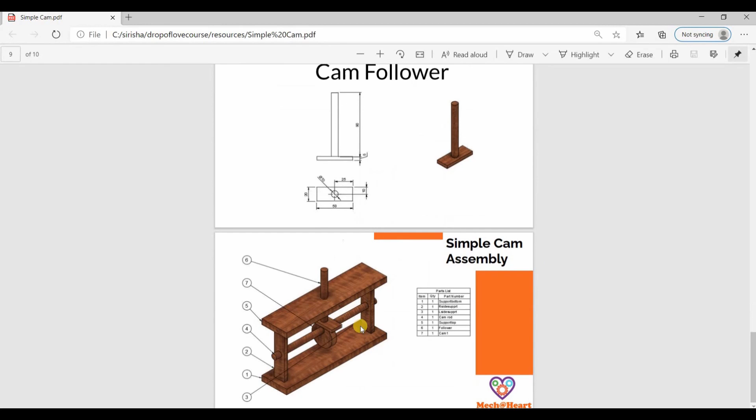From the resources folder given to you, open the SimpleCam PDF. Here you have this PDF which has the drawings for making this assembly of SimpleCam.

This is the bottom-up assembly approach we are going to follow. That is, we are going to create these parts independently and then take a new file and bring all these components together and assemble them. We will be doing them step by step.

In this chapter, we are going to see bottom-up assembly, joints, how to add joint limits, contact sets, and motion study. This is the most important chapter we will see, so please follow each and every step very carefully. The next cams we will do will be based on this simple cam.

Let's keep that PDF open and start designing each part one by one. The first part is the cam. Here we have a circle with diameter 40 mm, and it also has a hole at 10 mm distance from the center with diameter 10 mm, and the thickness of the cam is 10 mm.

Let's open Fusion and go to create sketch. Here let's select the plane, and we can draw the circle which is 40 mm.

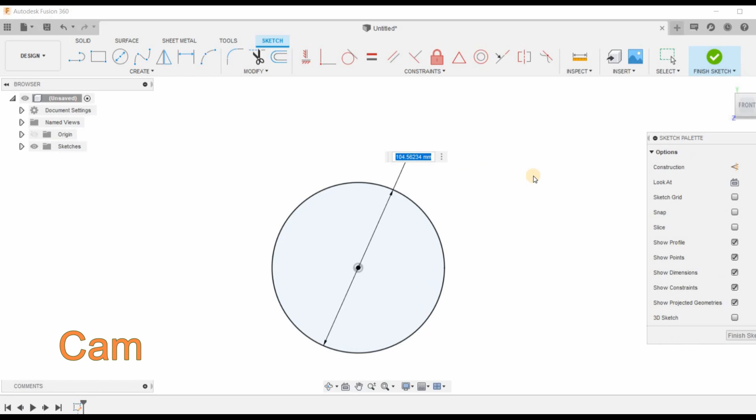Another circle, this is 10 mm. Let's check - yes, it is 10 mm. So here the distance is again 10 mm. I'm taking this vertical constraint because these two centers seem to be vertically aligned. So I'm giving the thickness of 10 mm.

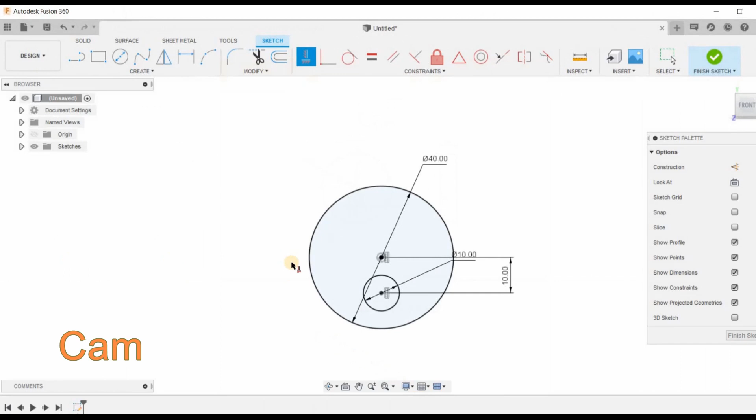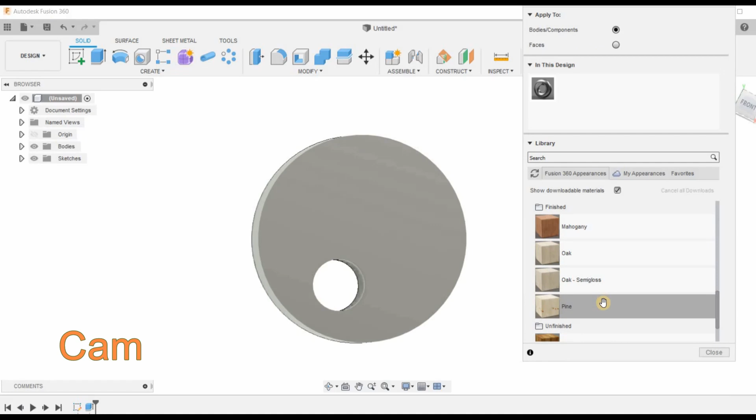Now I have this cam with me. Let's name this inside a folder. First, let me give a color to this - I'm going to go for cherry. If you see, it's looking very blurred, so I'll double click this texture and scale it. Now the grain size seems okay to me.

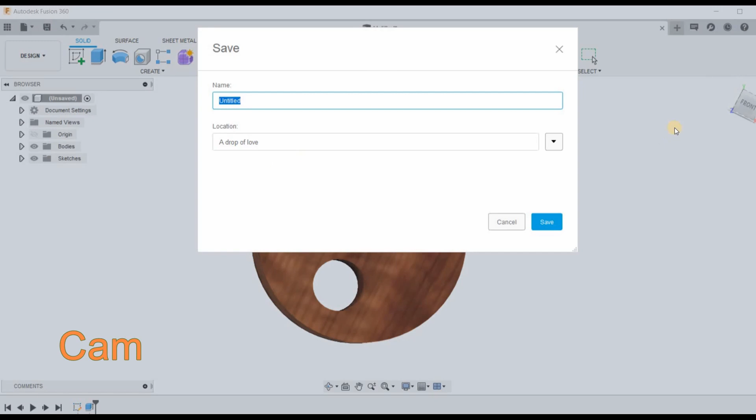Then I'm clicking OK. Before I save, I should have a folder within this project, so I'm going to the data panel. I'll create a new folder with the name SimpleCam, and inside SimpleCam I'll have all its parts. So I'm saving this by the name cam.

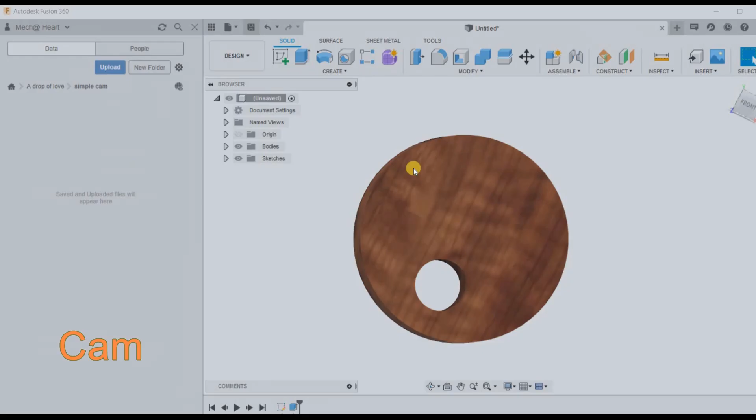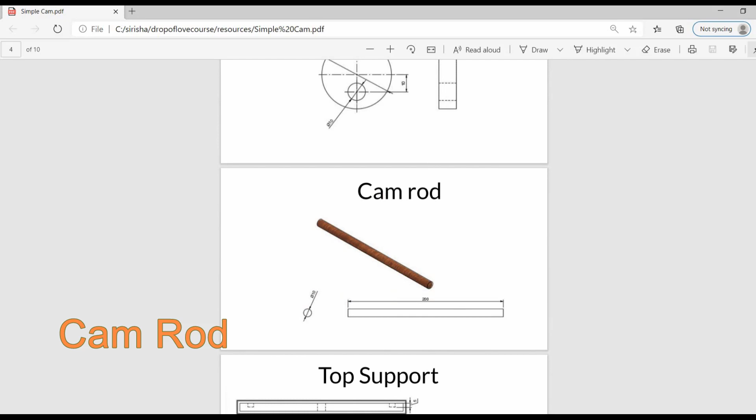Now let us close this. Let's go to the next component, which is the cam rod. It's just a simple cylinder, 10 mm, and I can extrude it to 200 mm.

So here I have selected the sketching plane. This is going to be 10 mm, and the distance is going to be 200.

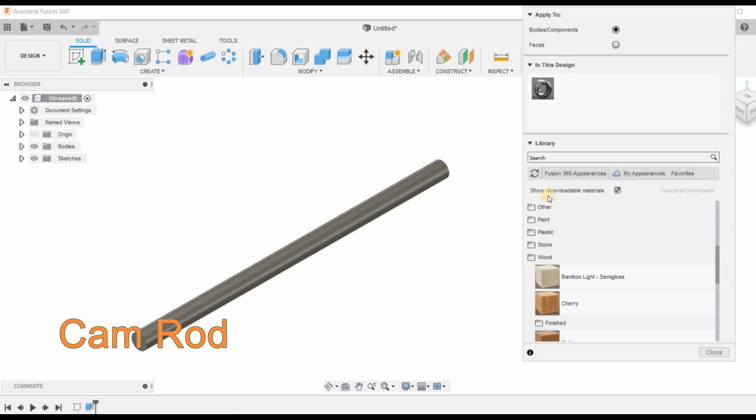Here again, I'm going to give color - selected cherry again and changing its grain size, and now I'm also changing its rotation because it should be longitudinal. Then close this. Let's save this as cam rod.

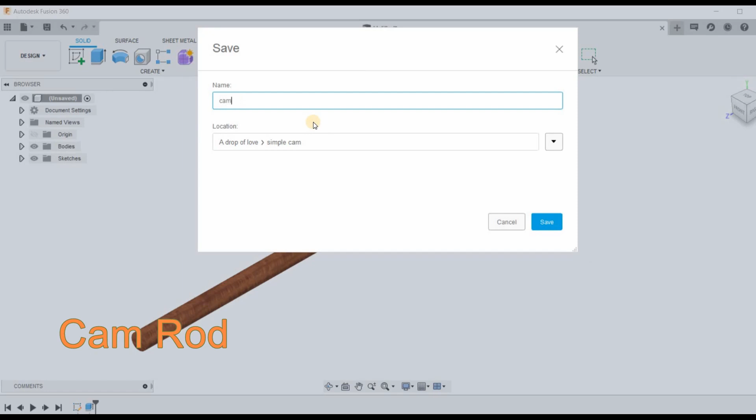If you have done the practice exercises, then all these components are very simple - you can very easily create these parts. Now this is the top support. If you see these pocket holes, these rectangular pockets which are there, they are not through, but the hole is a through hole. So I can create everything in a single sketch, but I'm going to extrude it multiple times.

So let me close this. I'll open a new file. After selecting the sketching plane, I'm going to draw a rectangle, and based on these dimensions, it's a 200 by 50 rectangle with the thickness of 10 mm.

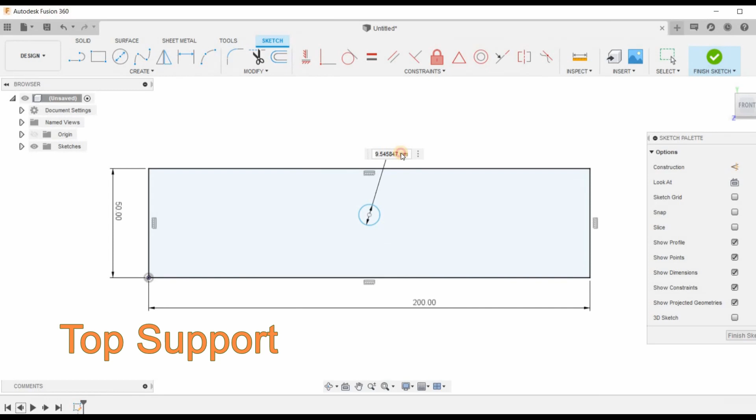And I'm just checking these dimensions also - this is 50. And here I can draw this circle and these pockets, 10 mm, and this is exactly at the center from both sides.

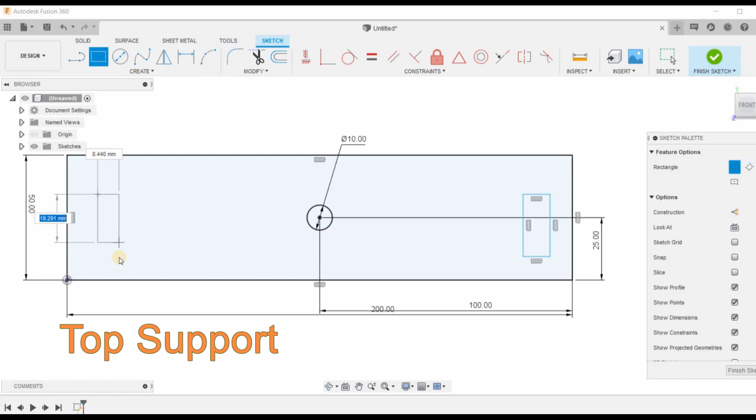Let's create these two rectangles. If I create one, the other can be mirrored because they are both equidistant, if you see. So I'm going to delete one - I'll create a mirror image later. First, let me dimension this.

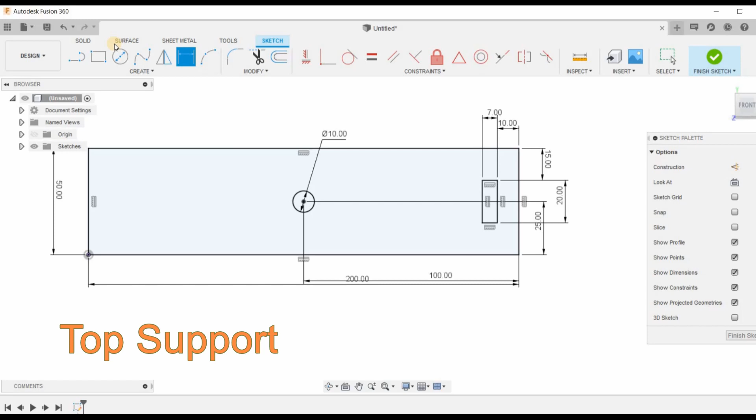This is 7 mm, at a distance of 10 mm from this edge. This is the construction line about which I'm going to mirror this one. So I'm going to create a mirror image over it. I by mistake selected it in the object, so I'm deselecting it. And again, I'm going to select this mirror line, then click OK.

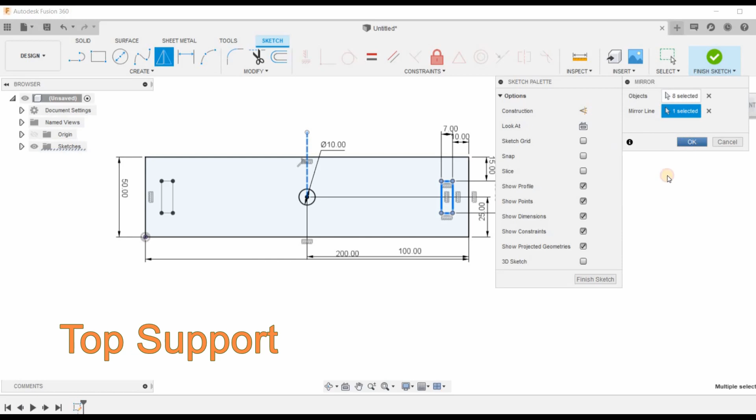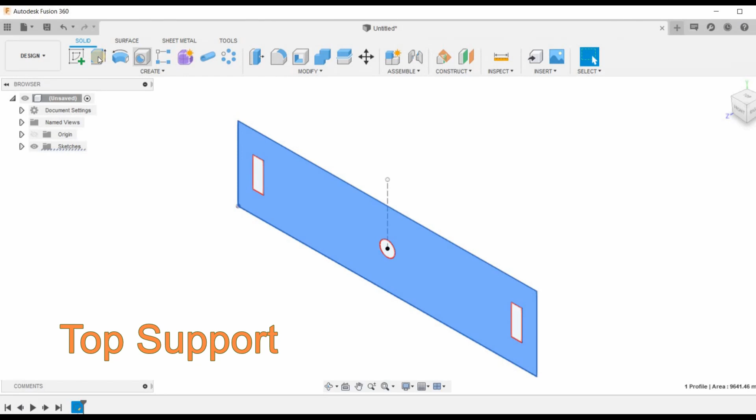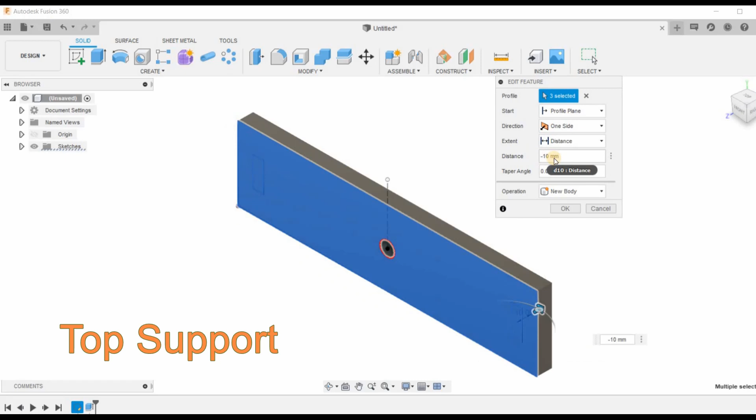So I can give it as 10 mm, but I'll try to give it as minus 10 mm because I'll be able to see the sketch clearly. So here from the sketches, just make the sketch visible and select these two pockets and then go to extrude. Here now I can select cut. I can say that I have to cut it by 5 mm.

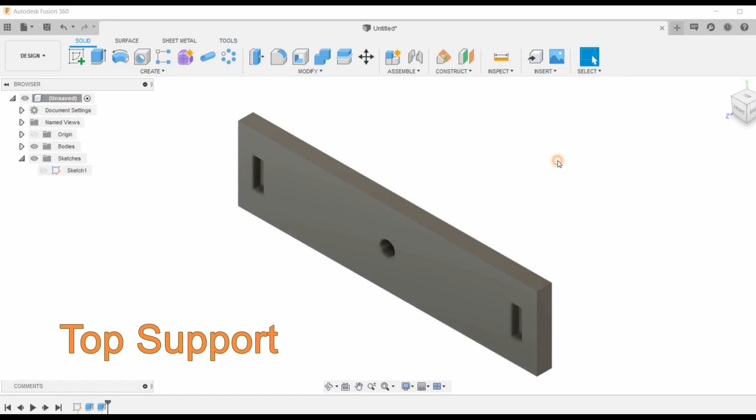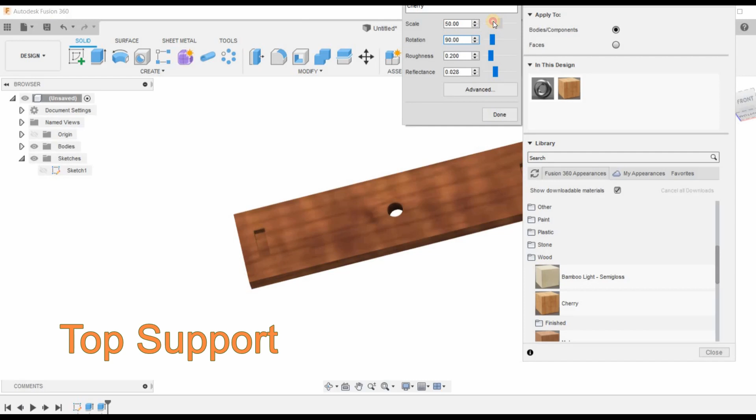Now let's hide the sketch and let's add appearances to it. Let's change the grain direction as well as the scale. Then click done. Let's close this and let's save this. I'm going to save this as top support.

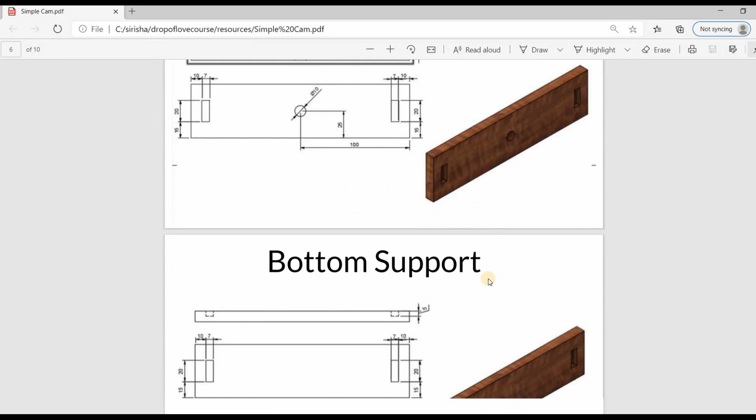Next, if you see, bottom support is exactly the same as the top support. Only thing is this in between hole doesn't exist. So I can save the same file as bottom support in the same folder. And now I'm going to make the changes. So what I'm going to do is I'm going to remove this hole.

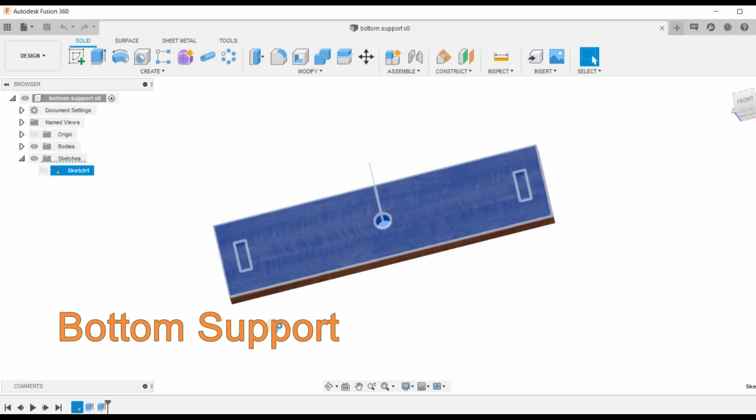So I'll go to the sketch and remove this circle. So I'll also try to remove this 100 mm. No, it was actually the dimension from the center line. So I'll retain it and then just click finish sketch and our bottom support is ready.

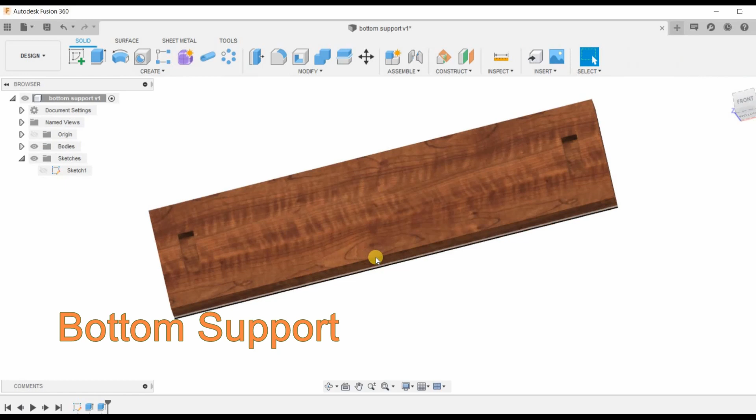So just save this. Now these two files are independent to each other. So if I make any changes to top support, they will not be reflected in bottom support. So here we have 4 components now ready for our CAM assembly.

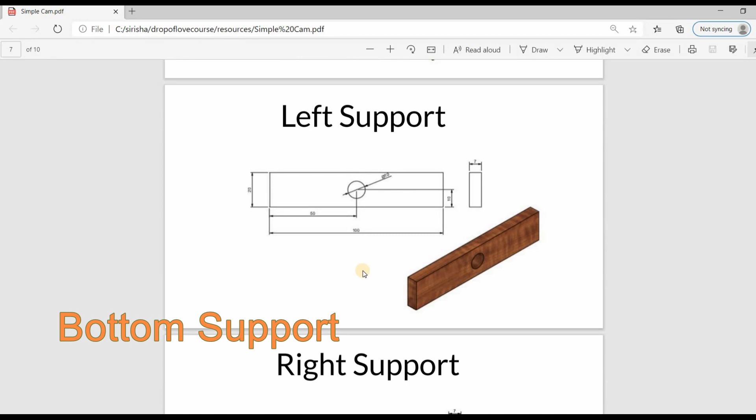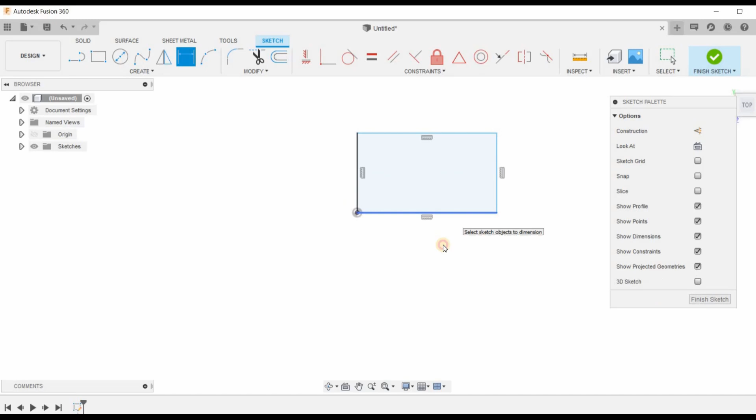So next is the left support. Left support and right support are exactly the same. We have through holes. So it's 100 by 20 by 7. So let's select the sketching plane. It's 100 by 20 by 7.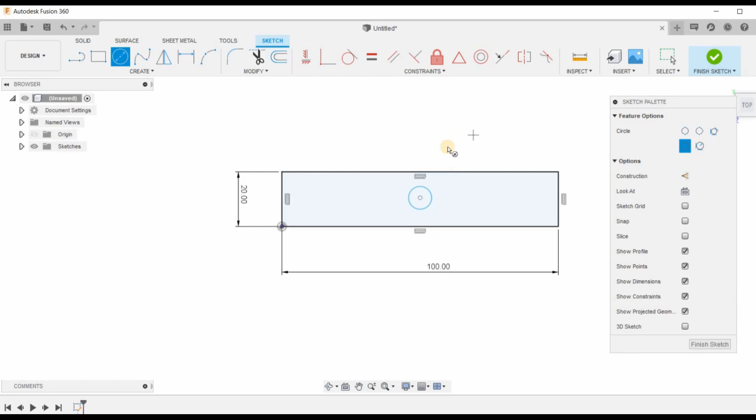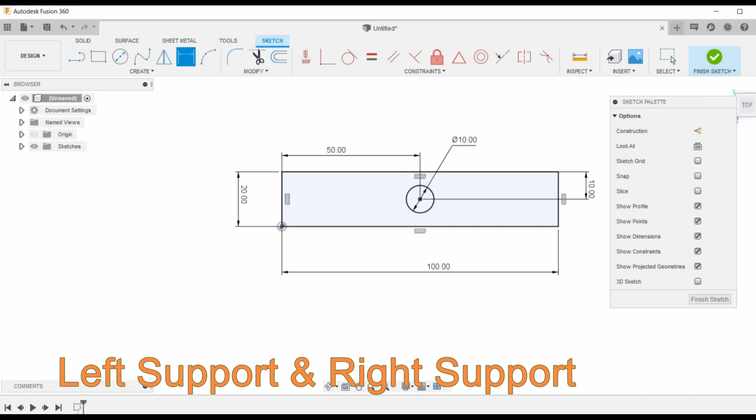And let's see, check the dimension again for the circle. This is going to be 50. This is going to be 10. And this distance, this has to be 10. That's right. And then we'll close this and then I'm going to extrude it.

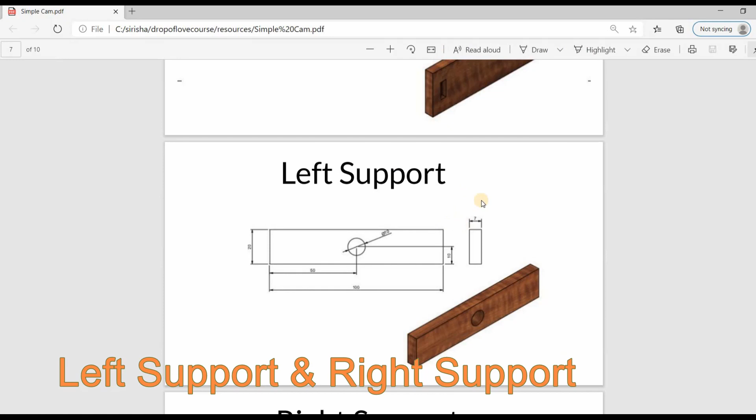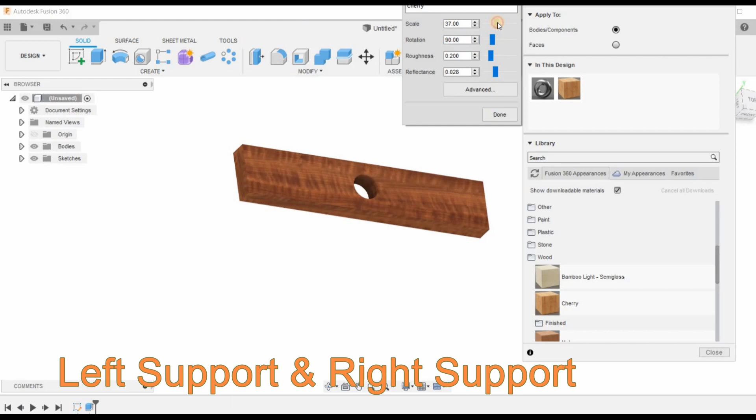I'm going to extrude it by 7 mm. Now again, I'm going to drag this for appearances, changing the direction of grain, and I'm going to scale it also. So this is going to be my left support and also my right support. So if I'm naming this as my right support, I can save this file, same thing as left support as well.

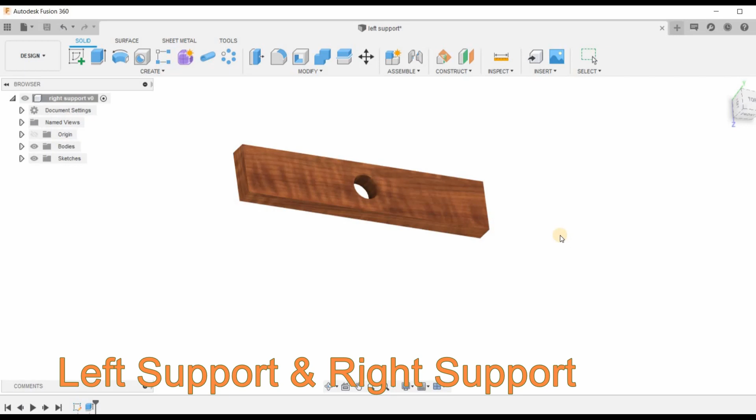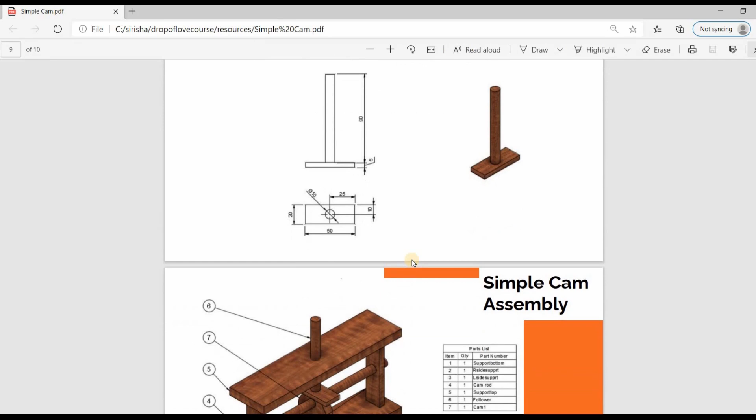Now let's go back to our PDF and we see that only this CAM follower is left. So let's design this. So it's a small rectangular plank on which I'm having this circular cylinder. This actually is a subassembly, but I'm going to make this as one component itself, just for simplicity. So here it is 6 mm thickness.

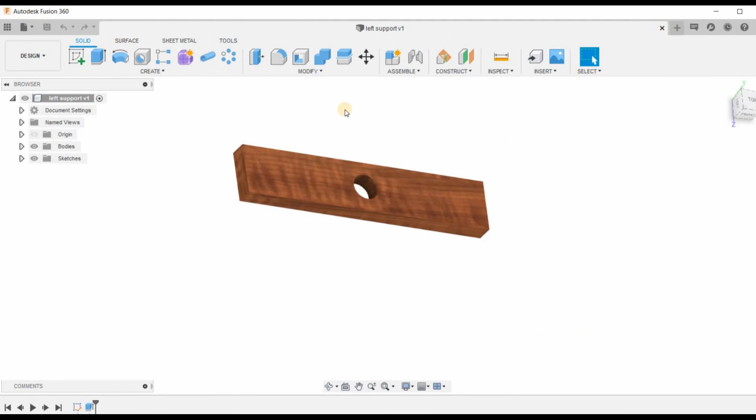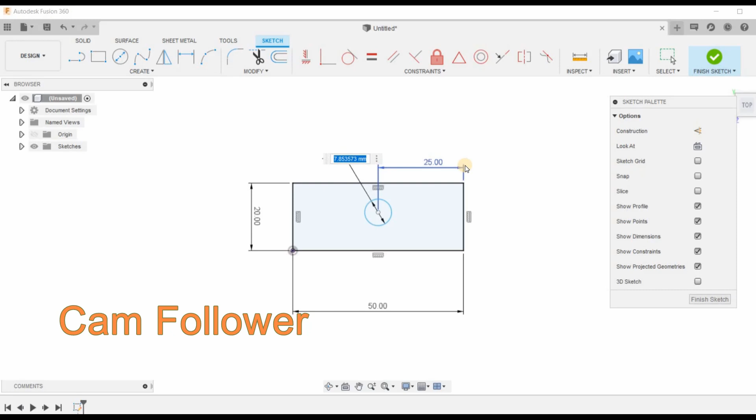Go to create sketch, draw the rectangle. Should be 50 and this should be 20. Let's draw this circle and this should be of 10 mm. This is also 10 mm.

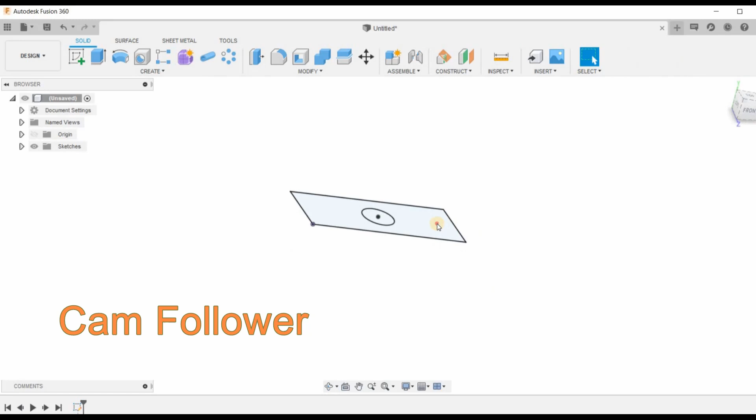Now this is not a hole, so we have to be careful on how much we are going to extrude it. Without selecting the circle, we have to do it. So when I go for extrude option, see to it that the circle is not being selected as I need the rectangle to be extruded. Up to 5 mm. Then click OK. Now let us highlight the sketch.

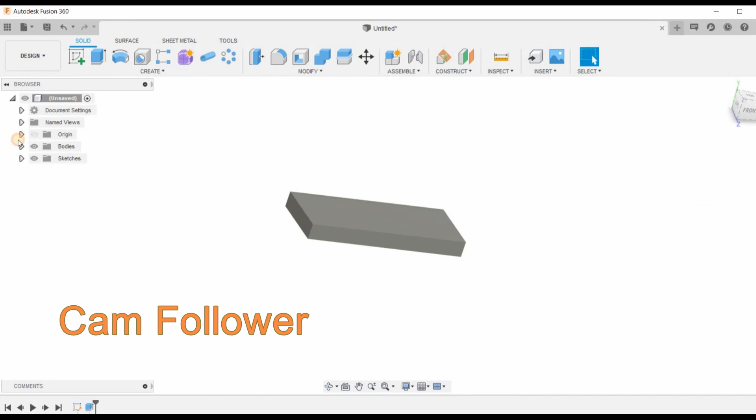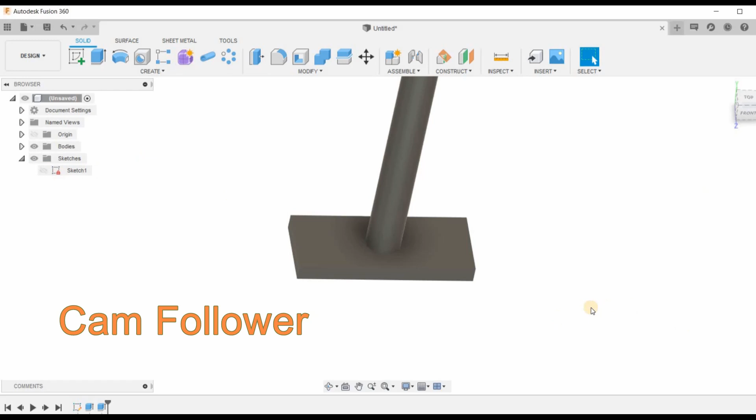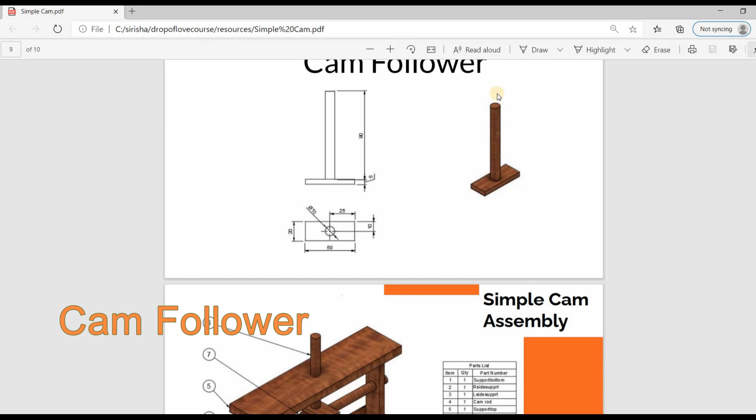We have this circle now, and this one I'm going to extrude it up to 90 mm. That's it. We have the follower ready. For this also, let's add appearances. This is fine to go. And so we have finished. Let's save this as cam follower. So all the parts now are made.